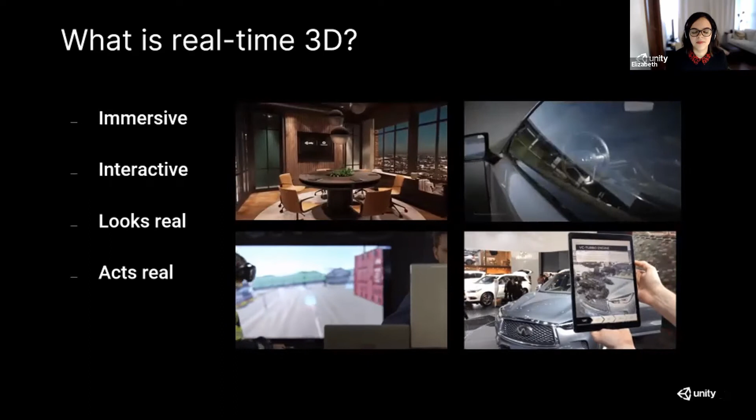But what is real-time 3D? Well, it is something that is immersive, it is interactive, it looks real, it acts real. It's like a high-end video game.

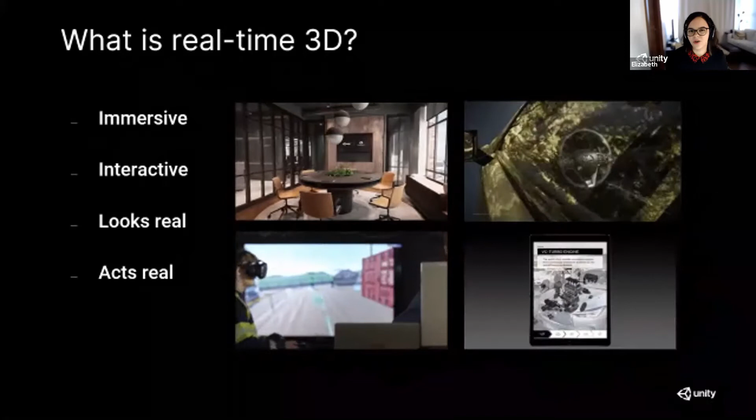So with real-time 3D, you can walk through a space, you can open a door, you can move objects, you can see through walls, and everything you see in there—the animation, the space, the light, all that information gets rendered in real time.

So we're actually curious to know what companies outside of games, specifically AEC and manufacturing, think about real-time 3D. We conducted a study last year with Forrester, where 97% of AEC and manufacturing companies say that they see a real potential in real-time 3D. 94% of those companies say that they're investing and expanding their investment in the technology. And on average, companies in AEC see at least 6 use cases for real-time 3D purposes.

However, only 19% are doing it. And the ones that are, it's only used for really large models or pretty late in the design process, where this kind of implementation is no longer as needed.

And you understand it's difficult. The experiences or the time needed to create real-time is everything but easy. It's really, really complicated in certain cases.

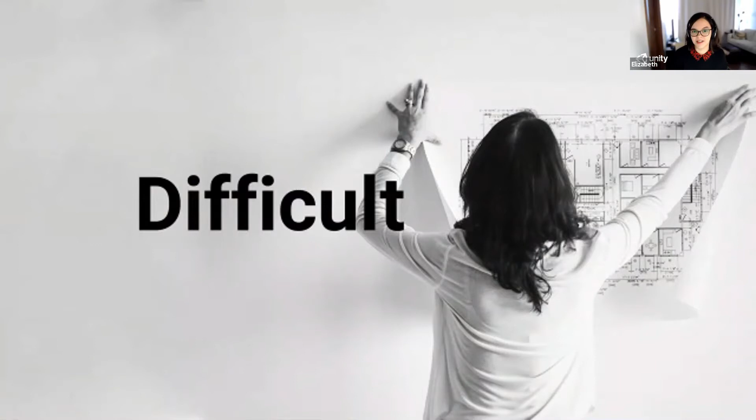So the reasons why—well, it can take days and even weeks for highly technical teams to prepare all the BIM data needed for this kind of implementation. Picture this: you have Revit files, 3ds Max files, and then you have to transform and convert that into other applications to feed VR or AR purposes. And then you have to go again through the vicious cycle if you have any changes. So all that is really a painful data preparation process.

Also, architects and designers—I'm an architect myself—are not developers, so very few can code in Unity. Even though the models are rendered beautifully, all the information that is lost with the metadata is really important to have for any type of visualization and work.

That also comes with work done in silos. So it's usually departments working separately, not collaborating together, which creates a communication breakdown that results in costly mistakes. And at the end, all the solutions don't align with the construction world. But as we know, time is money, and everything needs to be collaborated together where design iterations are multiple and you need different teams in order to do that.

So what are we doing about it here at Unity? Well, we partnered up with Autodesk to create native applications and plugins inside Revit and Navisworks to seamlessly integrate the data conversion and preparation process. And through that collaboration, Unity Reflect was born.

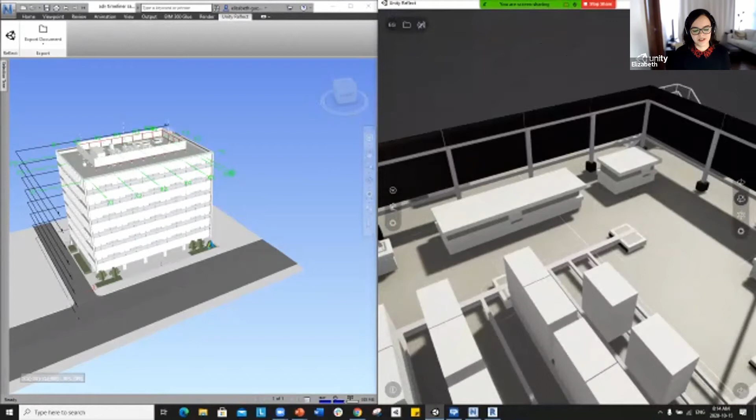In contrast, we have Reflect. As you see, for me to navigate easily, I just need a few mouse strokes to rotate. You can also dive into the space using a camera view to go around and navigate easily. We're well positioned to understand navigation better because we work really hard on this - as a game engine, we provide easy navigation implementations whether it's for AEC, film, or games.

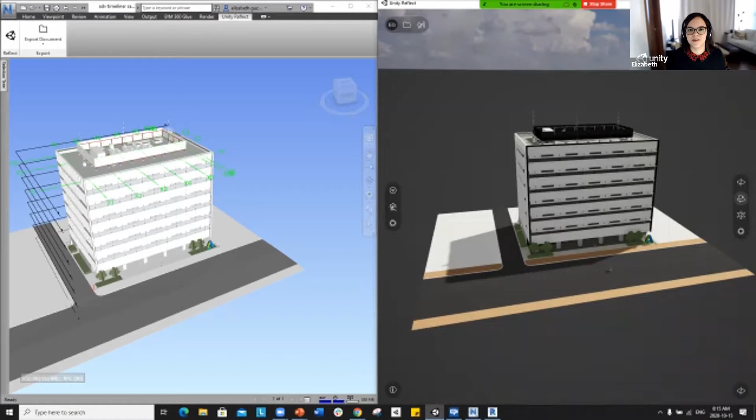All the information you have from Navisworks and Revit models, like the BIM data, you have here as well. You can filter out that information by categories, family - you're familiar with all of this. You can filter, isolate, and look at it all together. We also have other implementations and solutions we'll revise later as use cases.

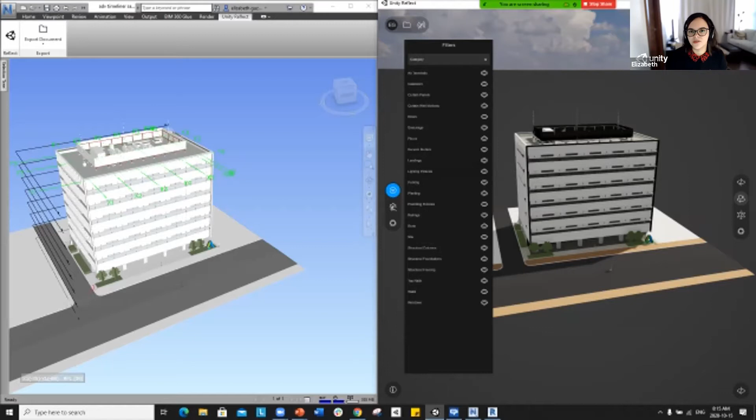For now, you're probably wondering how do I bring my model to Reflect, and how does it work with the old process? I'll share another model - we'll look at Revit as another platform to see how the interface looks. This is my Revit model. If you're familiar with Revit, you'll have another tab here called Unity Reflect, with three options: your dashboard where you see all your projects and their location, the export option, and the sync option.

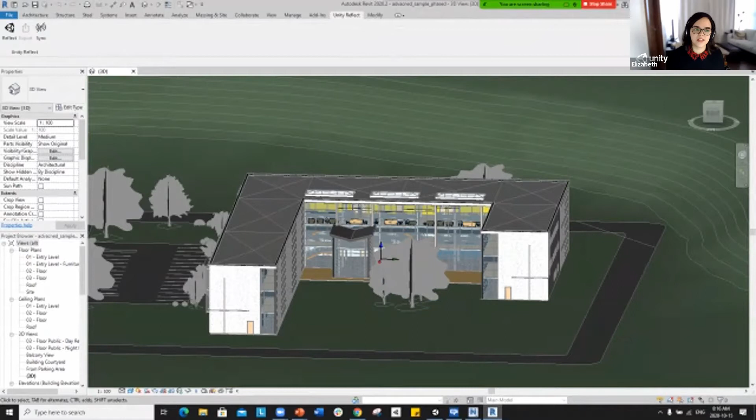With sync, we export all the geometry, information and metadata, and establish a live connection. If I quickly look at the dashboard, there are three locations where you can store or export this data: locally on your machine, shared on the local network with colleagues in the office, or shared on the cloud. Sharing to the cloud allows you to access the model anywhere geographically, and by anyone in your cloud organization.

On the cloud point, I want to note that we never actually push your model to the cloud - it's not the Navisworks file or the Revit file that goes there. We take all the right data, the geometry and BIM information, and that's what we use for visualization in Reflect.

Of course, if you don't want to push to the cloud, you always have the option to push locally, either on your laptop or desktop, or use the local network with colleagues. As you see here, I've established a live link with this model, but instead of me going over all the different options, my colleague John - who's all the way in Buffalo, New York, while I'm located in Canada - also has access to this model.

We're going to go over with him all the different implementations and solutions Reflect provides for design review. While we do that, think about these scenarios: how many times have you gone to a meeting where you've heard questions you've already answered before? You probably have - it's because communication between your occupants, building owners, designers, and end users isn't really good, so they don't understand each other. Visuals and language provide the common view needed for communication, and Reflect lets you bring your 2D and 3D drawings into a place where clients, users, and occupants can understand the design. With that, John, you can take it away.

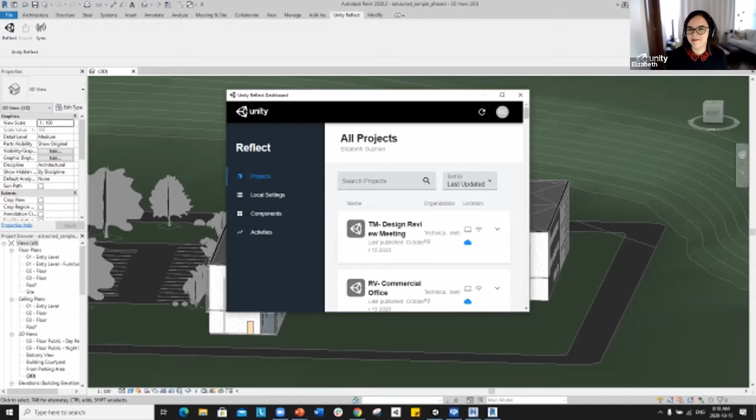You see my screen all right? Yes, we can see your screen.

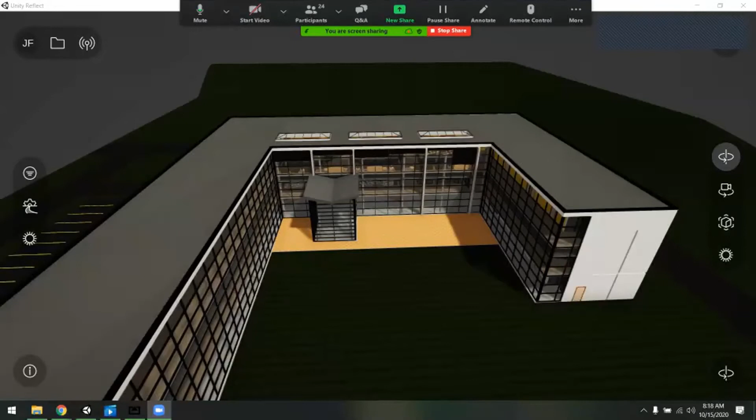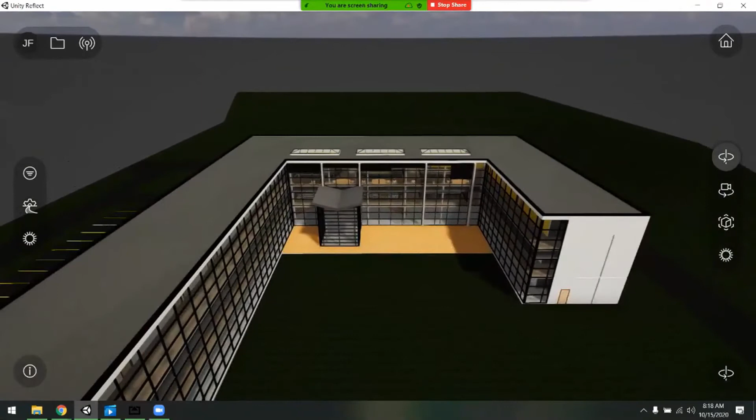So what if you wanted to have a design review session with stakeholders located all over the world? And what if those folks weren't very technical and didn't have access to Revit or Navisworks or a powerful PC? Here we see the same model that Ellie had up in Revit here in Reflect. With Reflect, you can invite anyone, regardless of their location, device, or technical expertise, to join in the conversation looking at the same exact project.

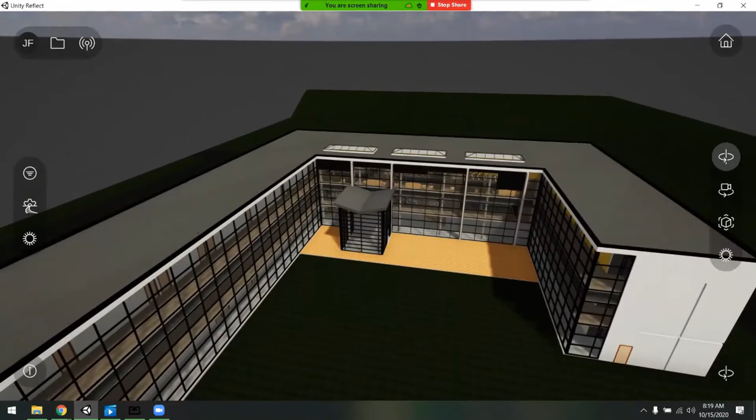So now from hundreds of miles away, I can control the Reflect viewer on my own. As Ellie mentioned, it's all very accessible and easy to navigate. Basic keyboard and mouse inputs would be familiar to anybody who's ever played a game, but with the background in gaming, a lot of affordances are made to make it as intuitive as possible, so the maximum amount of people understand it with a minimum amount of training. You can pick it up and play, and move around and get around everything pretty easily.

Now I can easily also just move into the space. Double clicking will allow me to teleport around, and I can get in and get a general view of what this space might look like inside. Without the need to parse any technical data or look through all the little pieces of technical info scattered throughout the project in Revit, I can see just visually what materials are assigned to what object.

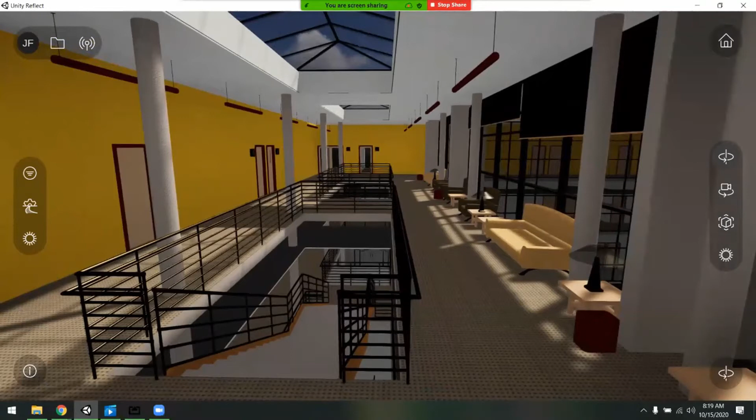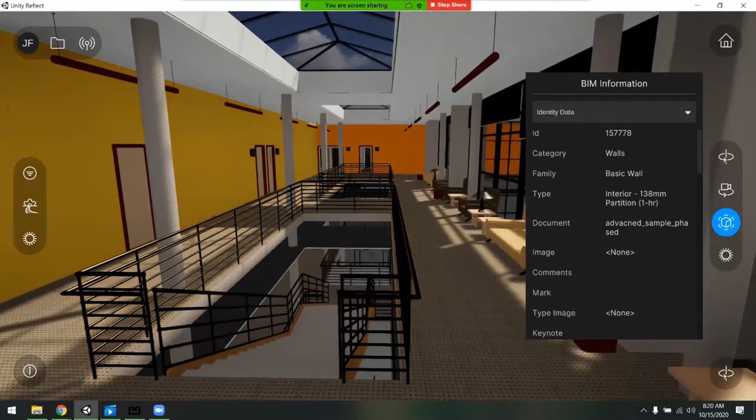I can see that the floor has this material, and I can select these things with this BIM information tool. By clicking on them, I can get direct access to the actual data coming directly from our same project. So I can see here the ID, the category, the family, and visually, what if immediately I can just see, what if there's an issue here? I can select on this floor and turn to my designer and say, can you please update the material on this floor with this ID and give it the hardwood that we talked about before.

Exactly. So John mentioned designer, that's my cue. I have access to the Revit model on my end. Like John mentioned, what happens if you're on the construction side and the wrong material was delivered, or let's say you have a purchase order with your contractor to change this carpet to wood? You already apply that, as you know, that's extra cost, and you want to see that change in your model. So I will go ahead and in my Revit model change the floor from carpet to wood.

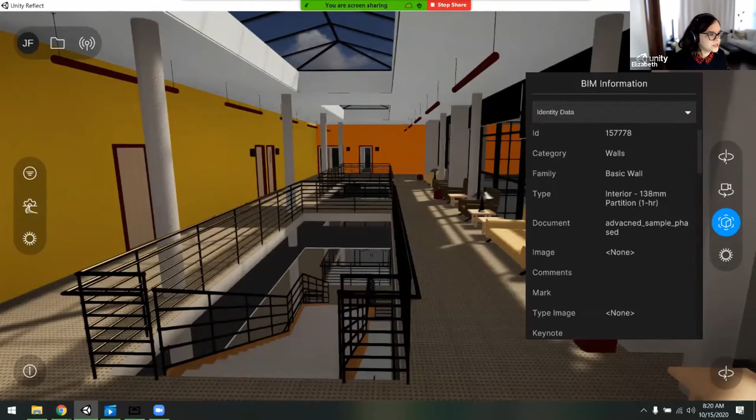And you should be able to see that change on John's screen. So I go ahead and search for my wood material in Revit, and I'm going to apply it to the floor. And there it is. That's all it took.

And not only can you see that the issue got spotted, but you can see in real time that the required change has been made and made correctly. I was able to clearly and unambiguously communicate, this is the object I'd like you to act on, without having to know Revit and ask, can you please update that? And it syncs live, and I can see the update live.

So now we know we're on the same page. We know the current state of the project. This is really important because communication can be really hard, especially across large multidisciplinary teams where everybody's all over, with their own backgrounds and their own lenses on the project. But Reflect offers something of a Rosetta Stone for that, allowing everybody to share the same unified view on the project regardless of their personal background.

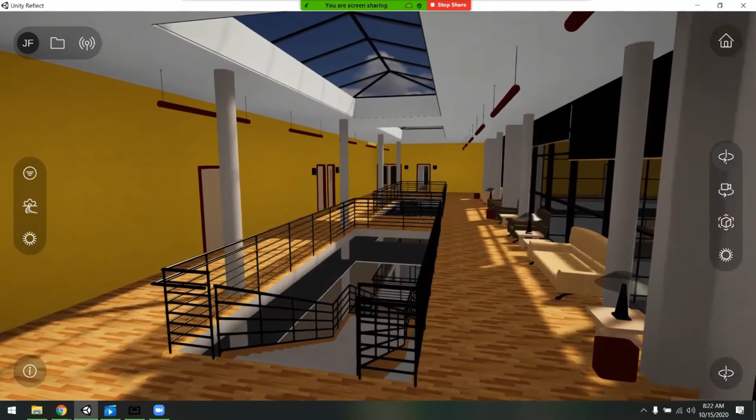And now we can see that the requested change was not only heard and understood in the meeting, but the change was updated in the document of record, in the actual project itself.

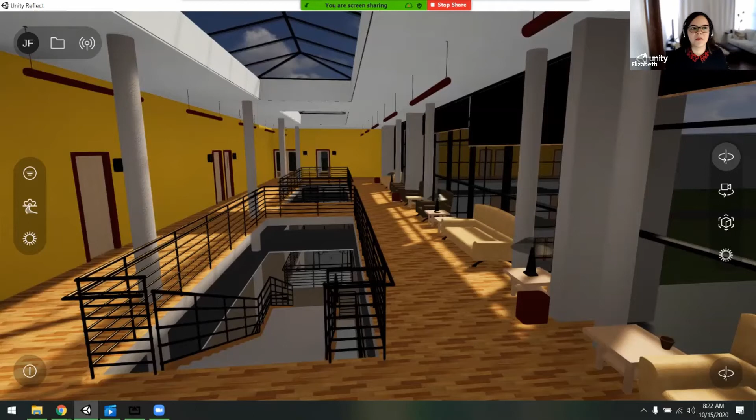Exactly. And I can speak to experience too, to summarize what John was mentioning. As an architect, and also someone with a master's in civil engineering, we encounter these issues every day. You probably encountered the issues as well. It's funny, because when I studied architecture, we didn't only take design courses, but a lot of humanities and management courses. They have to speak to clients. Communication is really important to be able to understand each other, apply the changes, and meet the client needs—that's actually a major thing in the role.

So imagine if I had Reflect back then. It would have been amazing to apply this with clients live during the session.

If you didn't catch this until it was too late, it could have a major impact on your budget and push your timelines. Think how much it would cost to fix if that little miscommunication had happened, or if somebody wasn't able to join the meeting from where they were. Now you can bring in all those folks to make sure you capture their view and avoid these miscommunications.

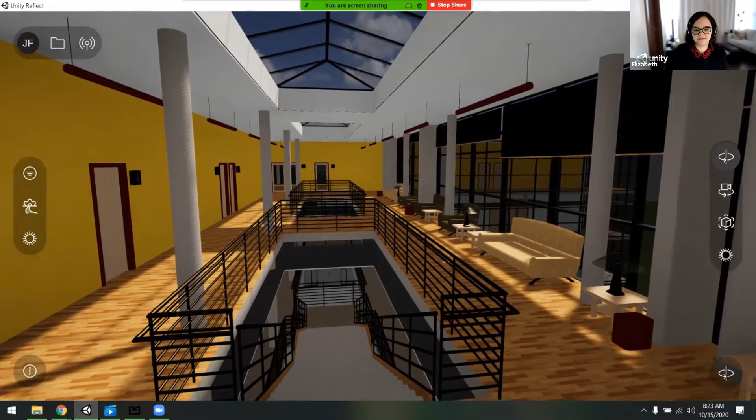When bringing people into meetings, sometimes you want a more basic view of the space to discuss the layout without getting bogged down in trivial details. To that end, we have a texture tool where we can remove all the materials from the scene to get more of a white card view.

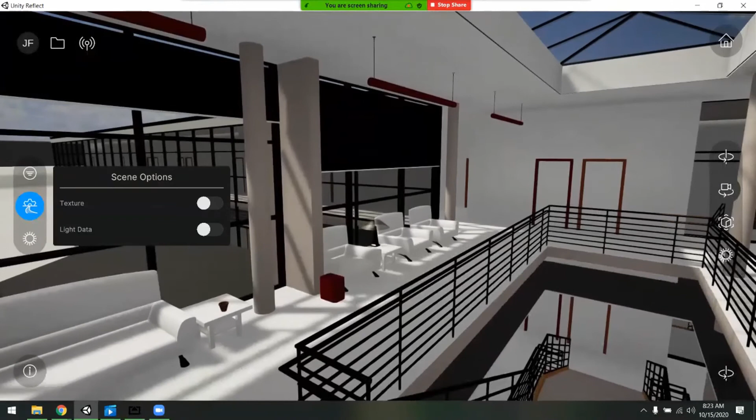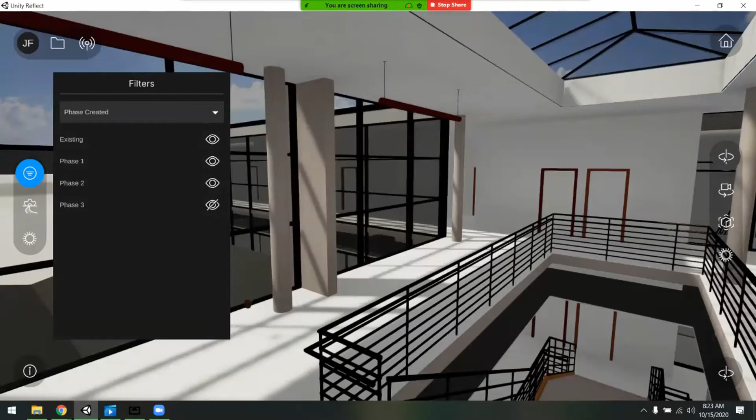We can take that a step further with our BIM Filtering Tool, which allows us to filter on any category. These categories are populated directly from the BIM data of the project itself, so we can select doors, ceilings, or, for example, view the project broken out by phases. Here we have phase 3. We can back this out to drop some details and get a more simplified view of the space, so we can discuss the layout without getting bogged down in things like the color of the walls.

I'm sure you've all been in a meeting that got derailed onto small details when more important matters needed to be discussed first. While those details might matter later, if you want to keep things on the agenda and on topic, it's sometimes nice to drop them out.

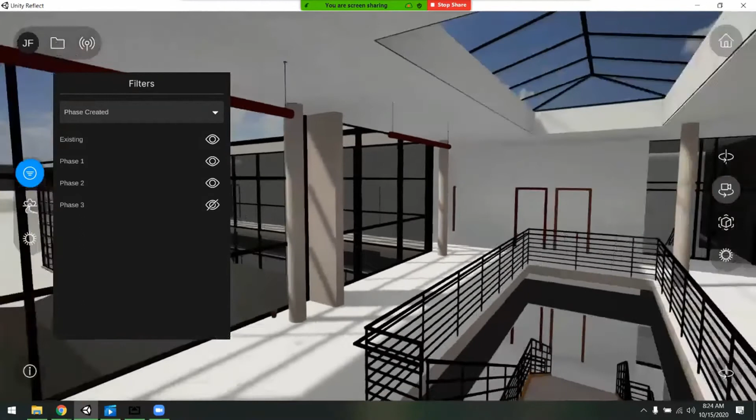As another example, we can build up the project using the phased view, stepping through the different phases as they come in—this would be the prior layout phase, then bringing in the walls, then these added details. And it's just as easy to bring them back in and turn the textures back on.

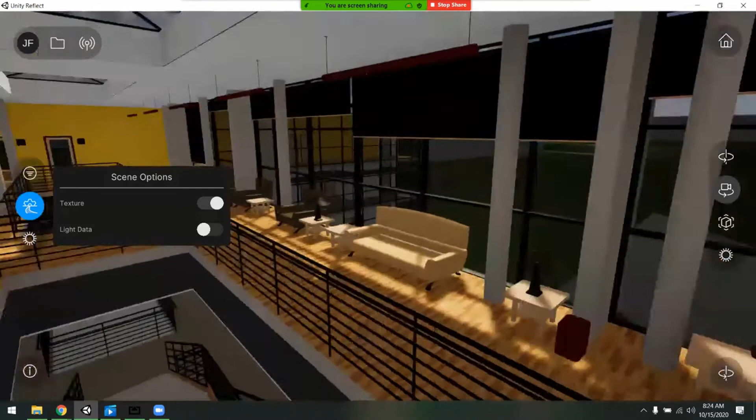Another thing to look into is our lighting data, which shows us what the interior lights look like. This can be important if you're meeting with folks responsible for lighting, and also to get a good sense of the space and what it looks like when it's not lit by natural light.

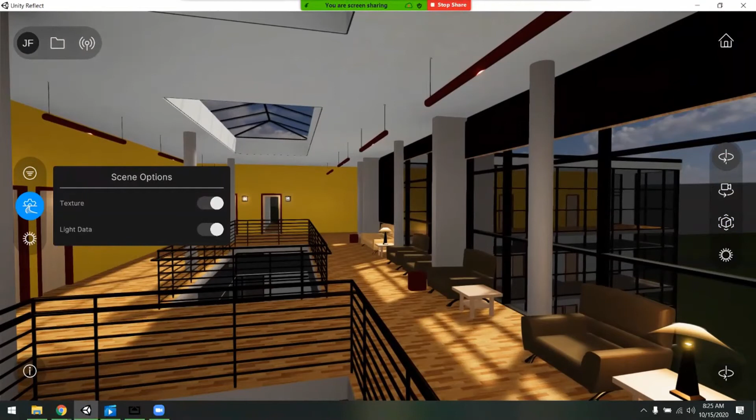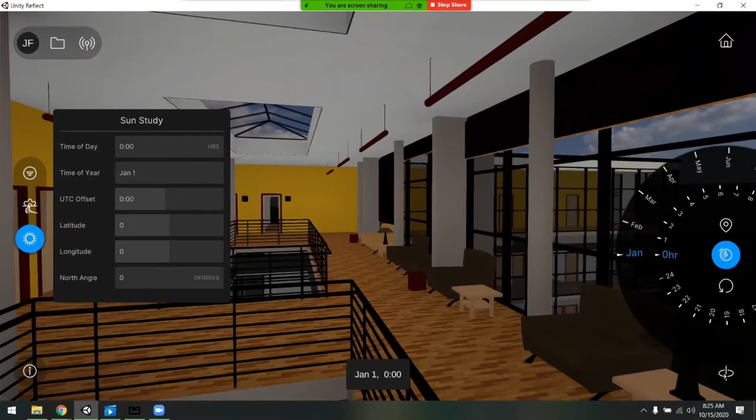We also offer the sun study tool. Once you know where your building will be, you can input the latitude and longitude of anywhere in the world and select the time of year. You can see, for example in winter, what the space looks like when lit at different times of day, rolling through in real time to get a general understanding of lighting conditions.

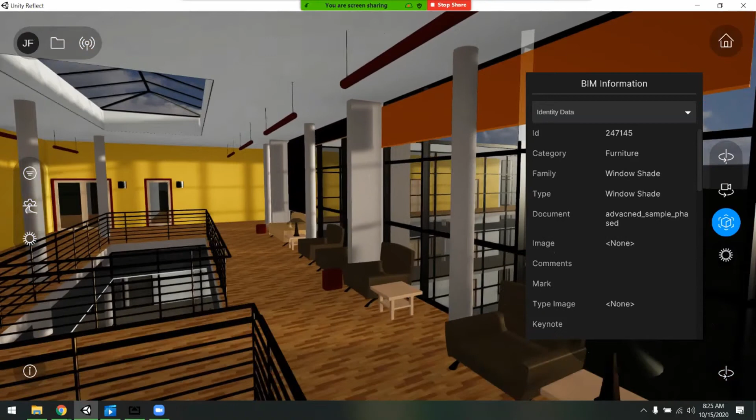For example, here around 6 o'clock in winter, there's a lot of sun pouring onto this wall. Maybe we don't want that much sun pouring into those doors at that time. This lets us easily see that perhaps we should add window shades here—without them, if we drop them out, we can see there's too much sun coming in over here. It's very visual and easy to identify and understand, making sure not too much sun pours into that spot at a certain time.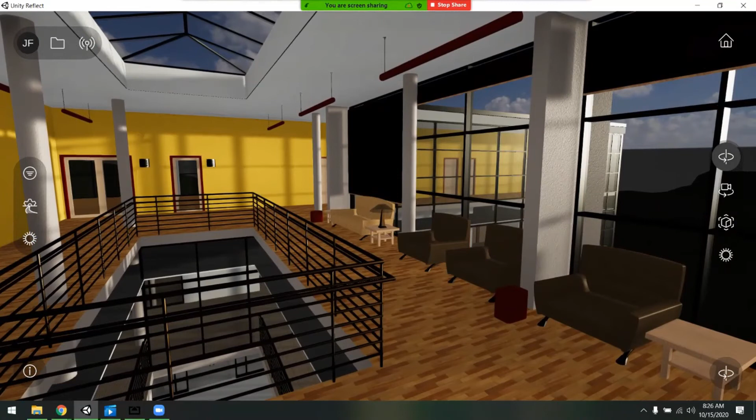This can also be really important in an urban environment where buildings next door to yours could be casting a shadow on your space. You can also incorporate that your building might be casting a shadow on a nearby park. That's important to understand early in the project because of its impacts—if you don't catch it early, it can be costly to figure out how to block the sun or ensure enough sunlight reaches other areas.

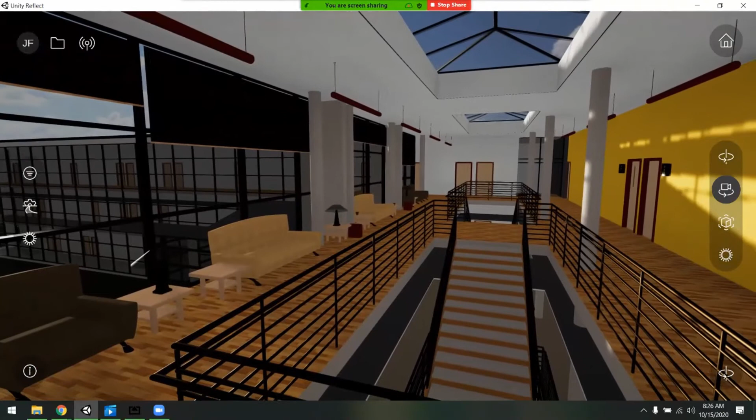So everything we've seen so far has been on our desktop tool, but as mentioned, you can use this on any device, giving you multiple perspectives. To that end, we'll also look at the same space in VR real quick—here is the same space in virtual reality.

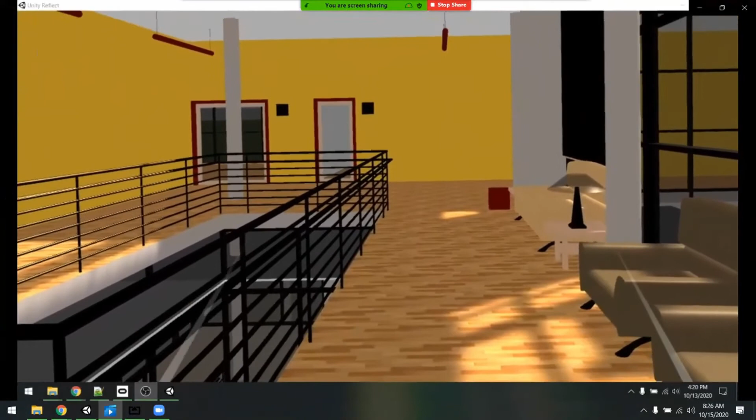You don't need to do any extra work to get it to work in virtual reality. It's the same preparation, it's the same data import. It's one click. It's basically changing your view over.

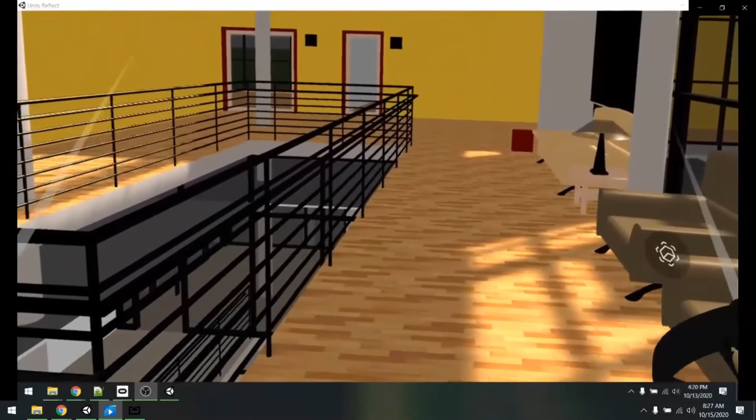If you have access to an Oculus Rift headset, you can pop it on, and now you can visualize the space from within true 3D stereoscopic rendering. Now you can actually feel the sense of the space. One thing that virtual reality offers is a real sense of scale, where you can actually feel how big the environment is, how far away is that wall. Does the room feel too tight and cramped? Does it need to be opened up more? How does this feel when you're actually standing inside it?

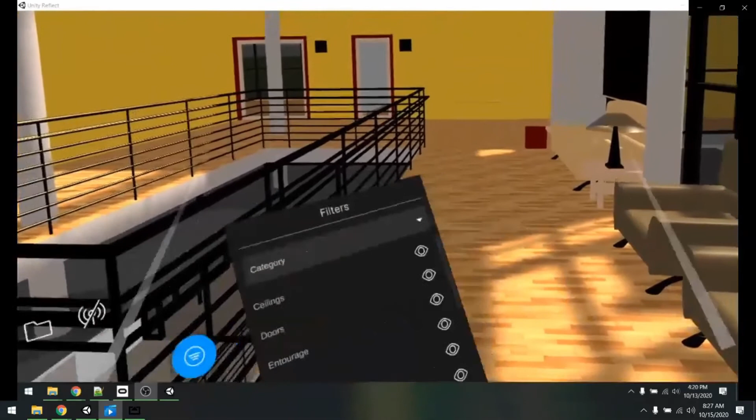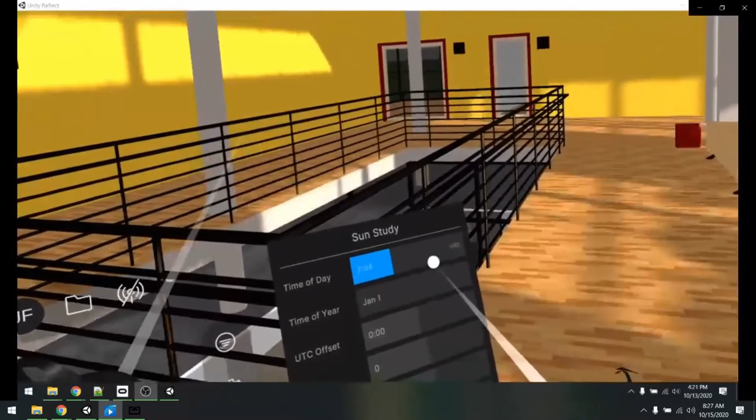And just because this perspective is unique and offers that unique perspective, doesn't mean it comes with a lack of functionality. We still have all the same functions I was showing: the ability to select objects, look at all the BIM data, move around amongst the space, turn the textures on and off. This can be a real exciting way to engage your owners and occupants and let them get a sense of what the space might feel like when it's done. It's a really exciting way to develop presence and excitement for the project.

Now, we also understand that not everybody has access to virtual reality headsets. But one thing that everybody does have access to are mobile devices. So here we see the same project again on a mobile device, and once again you see this familiar set of tools on each side, linked to all the same data.

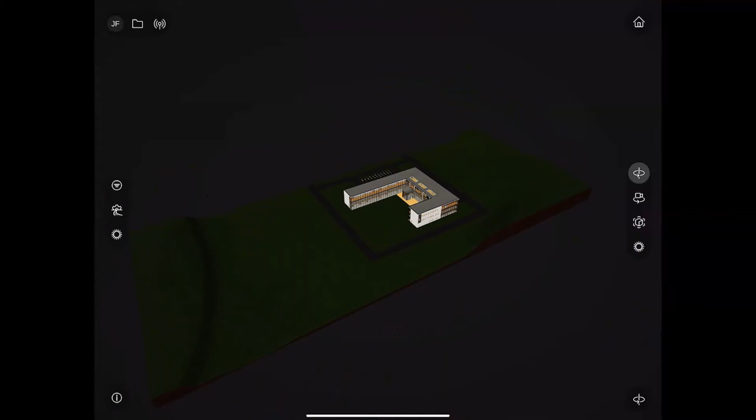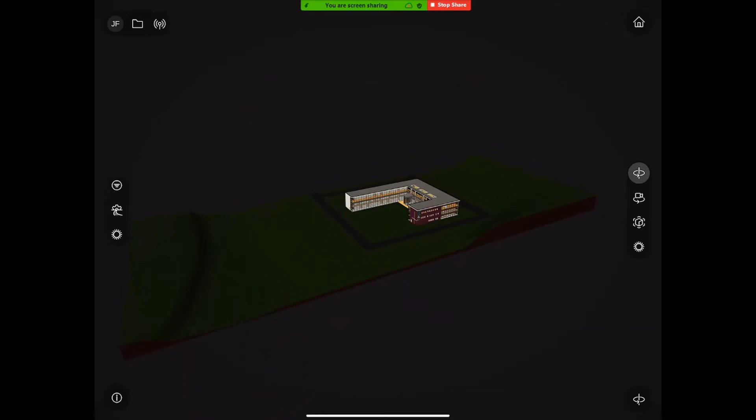Let's look for an easy example to show. Hey Ellie, could you please update the walls on the outside here? Yes, let me go ahead and apply that in my Revit model. And on my end, you can see within seconds of asking, without any technical need on my side, I simply visually see a need for a change. I can ask my designer to make that, and they can make it right in the actual project, and I can see it reflected here in my own view.

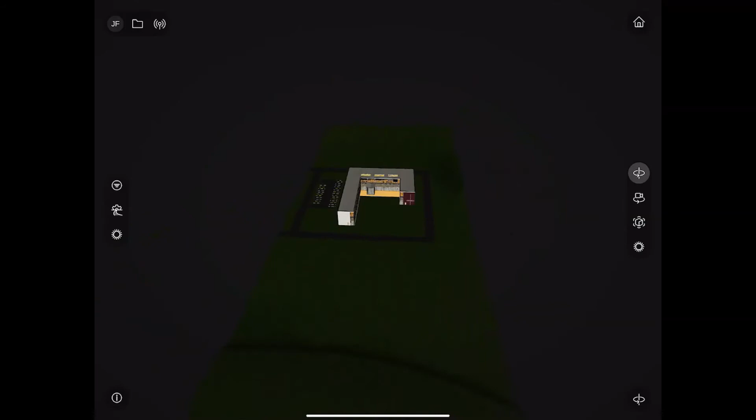Now you might also be wondering, I've got a giant architectural model, there's no way this is going to be able to be shown on a mobile device. How does this work? How can it get in there? Well, here I'll show you one loading from scratch. I'll use one that's even a little slightly bigger than the one we just saw.

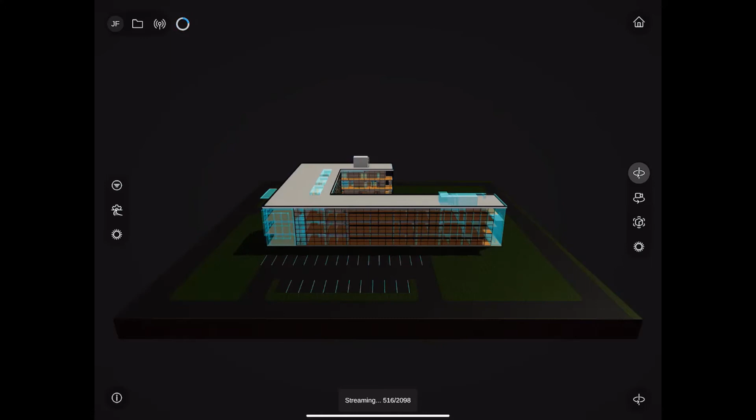So here we're seeing the model loading over time. I'm seeing things come in with that blue box setup. This is our custom progressive streaming algorithm. This allows Reflect to load these very large models in steps. Now, while it was loading, you could see that I was rotating and already looking at the model while it was doing it. It doesn't lock the process down and wait for the entire thing to load.

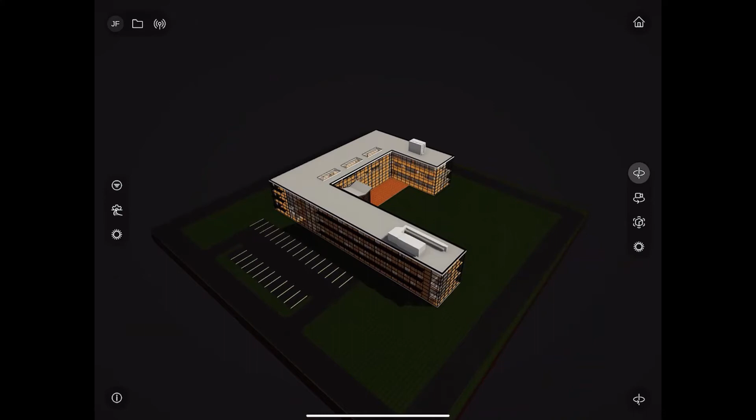I can get in and start looking, and it will start loading the things that are within my perspective first. So the things most important to what I'm looking at will be loaded first, and the other things will be loaded in the background. Eventually, it will all load. This also means that by using this algorithm, we can load very large models and get them to show on a variety of devices.

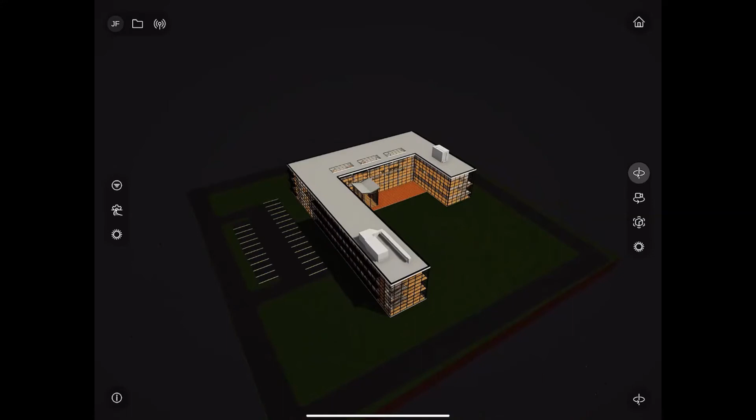So no matter where somebody is, they could be anywhere in the world. They could be on site, out in the field, and they can take out their phone with Android and iOS and open up the same view that everybody back in the office is looking at and get insight into the project. And again, all the same tools apply.

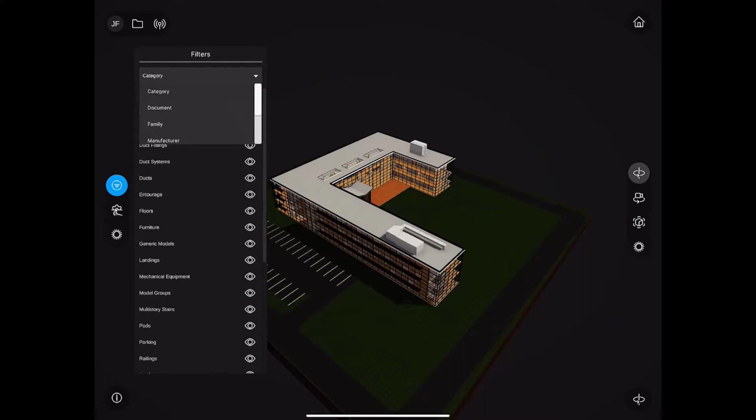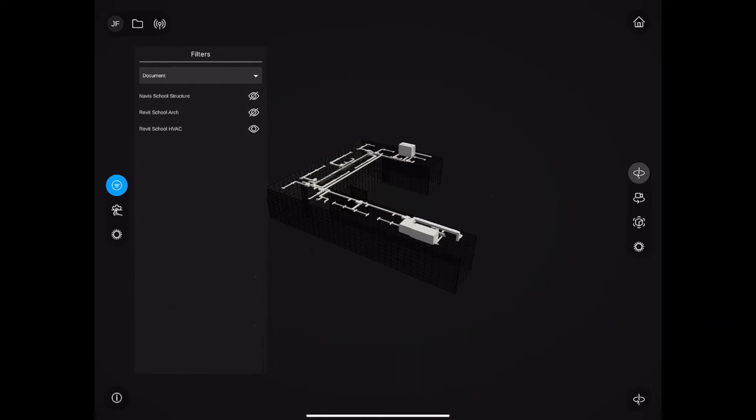We can also use our filtering here. Now this one I said was slightly larger, that's because it also includes the federated data from Navisworks that allows us to see the structural and HVAC data. So if I take away the architectural data, I can now see the structural data, the HVAC, and you can turn these on and off at will. It's a real easy, intuitive way to see if there's some conflicts before you get too far into your project. You can catch those, because it can be really costly mistakes if you don't see them. And it's really easy to see when you're visualizing it in 3D.

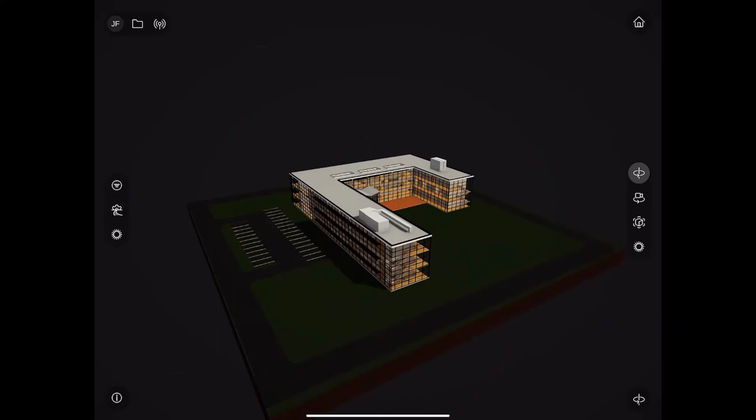Now, another view we also offer here is the ability to throw this into a tabletop AR situation. So what I can do is open this up and find a spot anywhere in my room. And now you can see the model locked to a location in your physical space. I apologize if I get a little far from the mic and you can't hear me so easily, because I'm actually walking around the model.

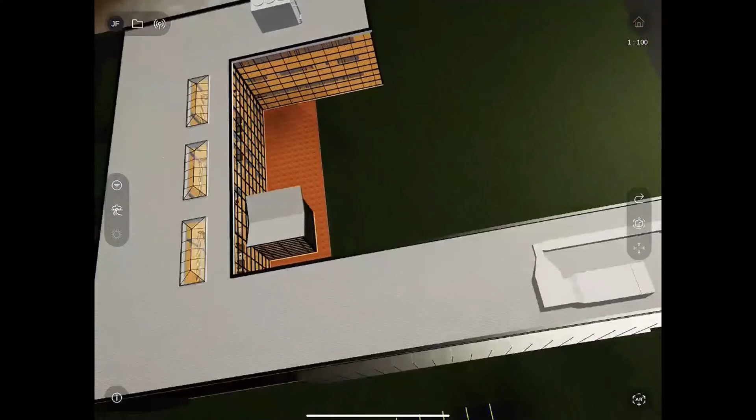This is really great for your extremely non-technical users because it requires no input. You simply can look around and get a sense of what the space is. And if it's a little too tight there, you can use the scaling tool to shrink it down or blow it up. So I can bring it up.

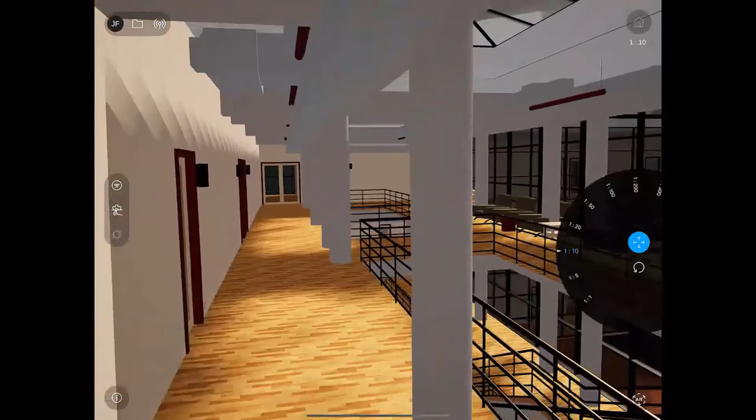I can get another view into my space, kind of similar to what we saw with the virtual reality view. But now I'm just viewing it through a mobile device. I can look at it from all these different angles. All you have to do is move around. And you can take this all the way up into even being full one-to-one scale.

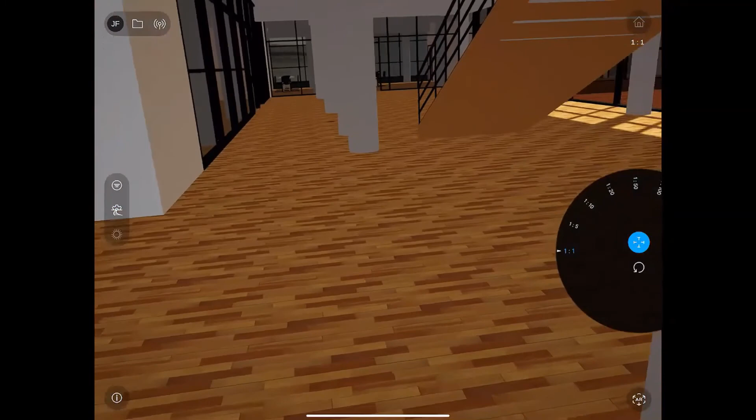So now I can actually stand in the space and see it just with my mobile device. I can just walk around and see it from any angle here, just through my mobile device. And I'll shrink it back down.

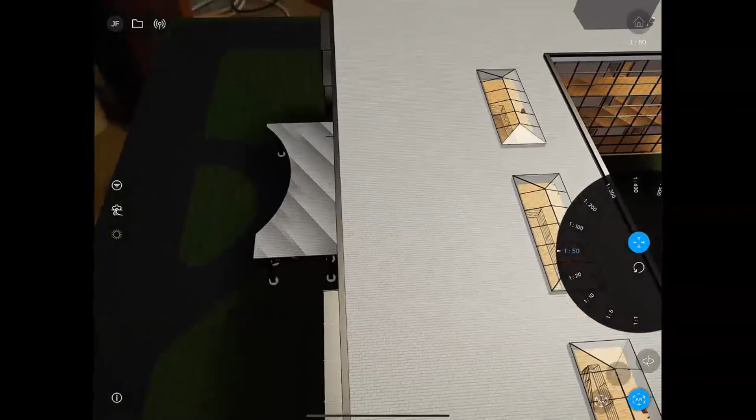As you can see, Reflect offers you the ability to connect all your project members in one unified, immersive, collaborative, real-time platform, regardless of device or location. You can use your desktop, laptop, VR headset, mobile devices, even tabletop AR. And all of this works together to bridge that gap in communication and make sure that everybody has the same vision of the project together.

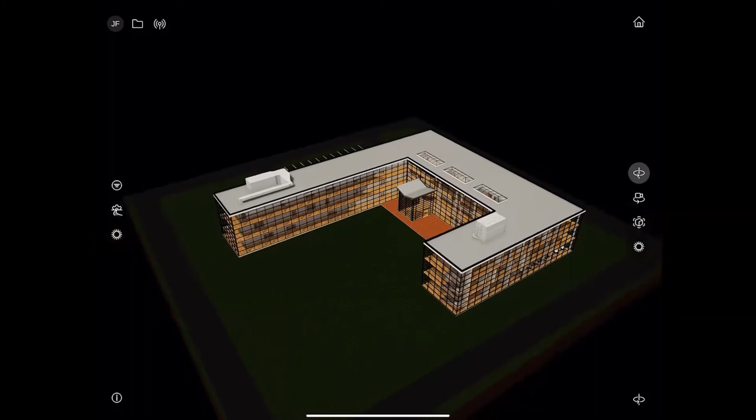Relying on the old design review models where you can't include people that are remote, or if they're not technical enough to contribute to a conversation looking at a Navisworks file, you're opening yourself up to miscommunications and increasing the risks on your project. Giving them an accessible and unified view, you can involve anyone, anywhere, on any device, and get their insight. That can save you time and money that would be lost on rework, but it also engages them and grants them ownership on the project. And that'll grow their excitement, because when they're involved in the discussion, now it's their project too.

Right, Ellie? Yeah, exactly. Thank you, John.

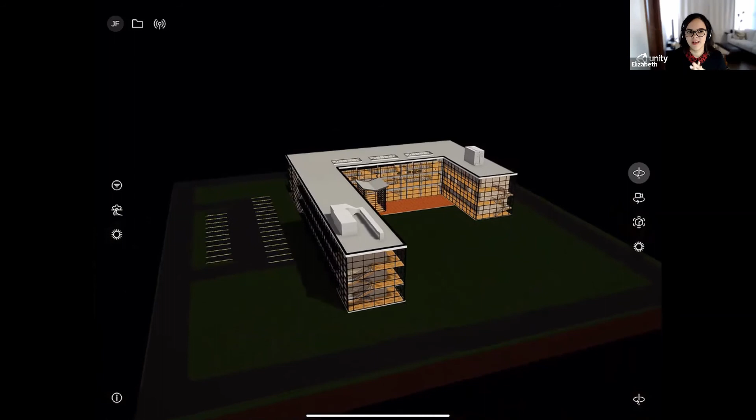To summarize everything you saw here, this is why we offer Reflect out of the box. And the interfaces with Revit and Navisworks might not be the best ones to show design review in a meeting with non-technical users.

Is a camera frame or a single picture and image really the best way to communicate your design? Think about how efficient it is for your customers, how many times you struggle to communicate the designs and also share feedback back and forth. So as you saw with Reflect, it provides you with all the tools and the interface to do that, and to answer all those questions for different solutions and implementations that we just presented.

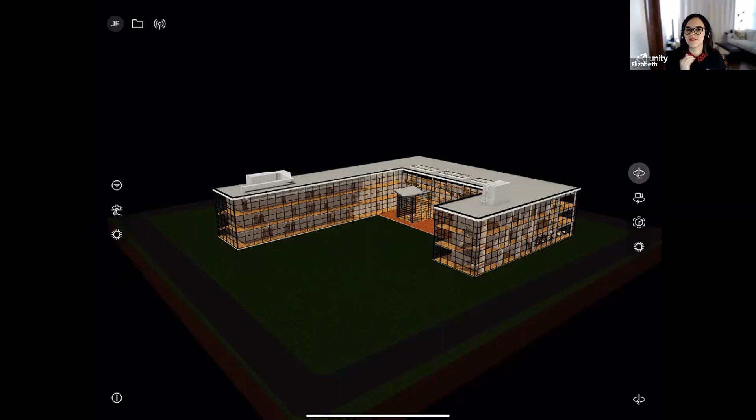It's also important to note that if you have any features or options that you didn't see us show, know that Reflect and the viewer are completely extensible. Reflect itself is built on Unity, which can be used to make pretty much anything. And with Unity Pro, you can use the platform to develop any custom solution you can think of.

We've seen companies make great use of this in many ways, even going so far as to create a one-to-one AR experience of their building at the location where they're building it, virtually incorporating it into the skyline before it's done, which is very cool. And even if you don't have developers on staff, you can work with your reseller to get anything you need made.

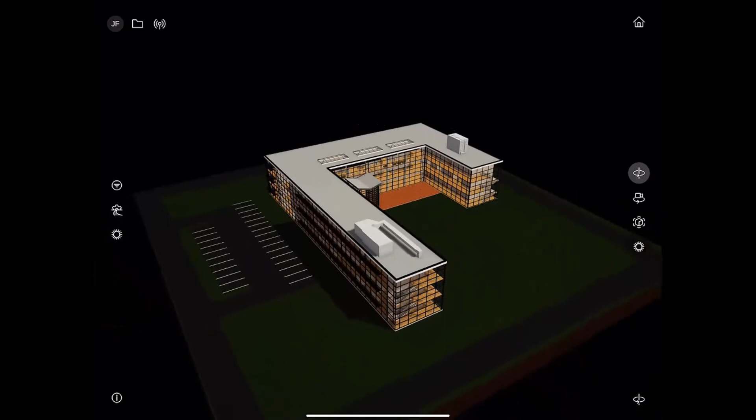Some of the examples that you can use for this type of customization to build upon Reflect is that you can brand the experience by having the logo of your client, the information of the company, and the different design options and images that you want to include.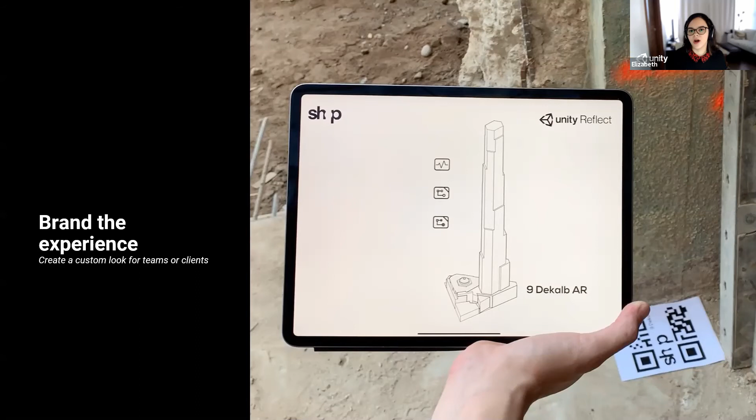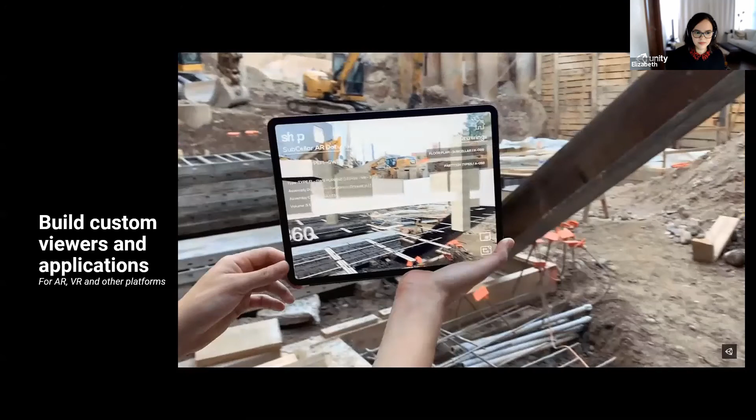You also have custom applications like one-to-one AR, where you can overlay content into the real world with a construction site. And you can also create more photorealistic environments, if you want really high detail, or different interactive experiences where you open doors, move materials like you saw, or experience the environment in a different way. You can also do that with the engine.

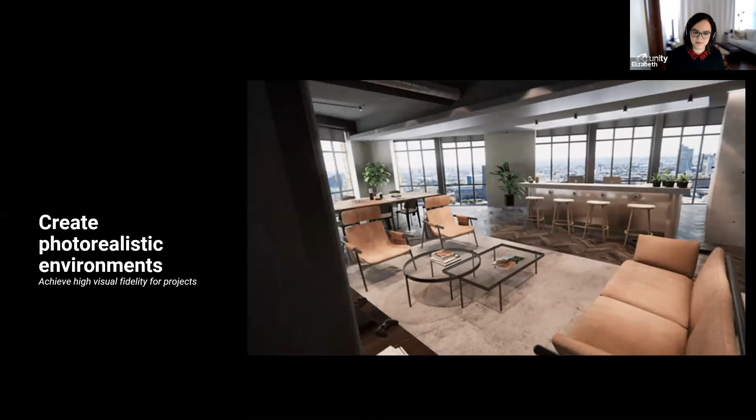I'm really excited about Reflect, because as an architect who has worked with all different applications and implementations, I find that Reflect allows everyone, technical users and non-technical users, building occupants and owners, to give actionable feedback and insights, to be included in the conversation that maybe they weren't included in before. And it doesn't have a limitation of training you need, geographic location, or the device you're using.

And this is just me, so don't take my word for it. We also have clients utilizing Reflect. For example, we have Adam from SHoP Architects in NYC saying it's a game changer for the industry. So after this presentation today, we hope you're excited to try Reflect out and that it also becomes a game changer for you. With that, we'd like to thank you and thank our partners again for their support and continued partnership, as always, at Unity.